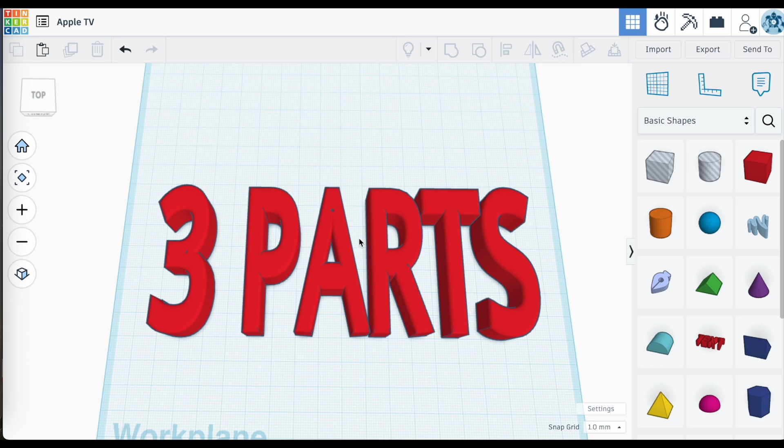Let's go. So in creating this mount, I can basically break this project up into three parts. Part one, creating an Apple TV cutout. Part two was designing a container that actually fits around the Apple TV. Part three was designing a mount that would allow the mounting of this container to the underside of this cabinet.

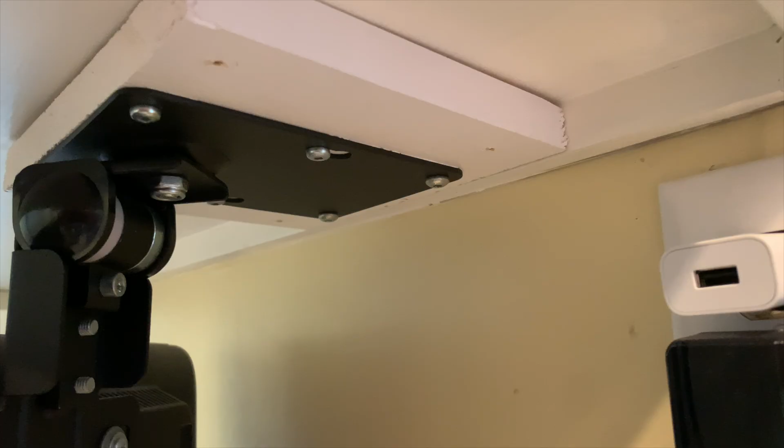Now for part one, creating the Apple TV cutout, there were some design elements that I wanted to make sure I addressed. I wanted to create a container for the Apple TV that would essentially wrap around the body of this Apple TV unit. Now, it's an older Apple TV, a 4K unit, but I wanted to use this with a small TV that was mounted underneath a kitchen cabinet. So for this project, I needed to create an Apple TV replica in Tinkercad that I could build around.

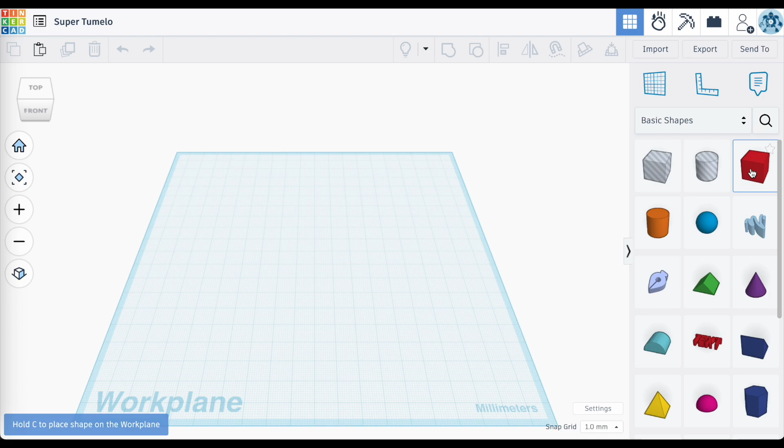The most obvious place to start was with a box and using those radius settings to create those nice rounded corners. Eyeballing the shape of the corners was not enough if I wanted to create a snug fit around the Apple TV. So to help guide me, I opted to take an image of an Apple TV of the same model, convert it into an SVG by importing it into picsvg.com.

The website is relatively straightforward to use. Once you've uploaded your image, you do have some options there regarding the detail and the types of filters, but I'll include a link to a video that goes into this in some more detail at the end of this video. Then I downloaded it and then uploaded it into Tinkercad.

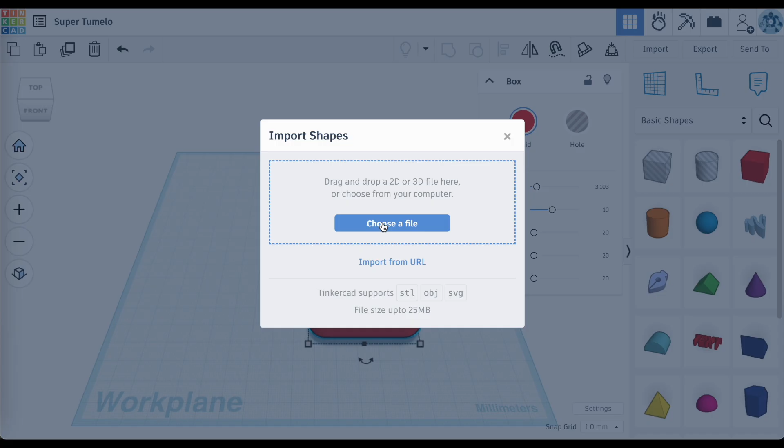Now, the ability to import images into Tinkercad can serve many different purposes beyond just creating templates, so be sure to check it out. Now, one thing, you just had to make sure that you imported it as art. Again, this was a relatively easy step, and this is what it looked like.

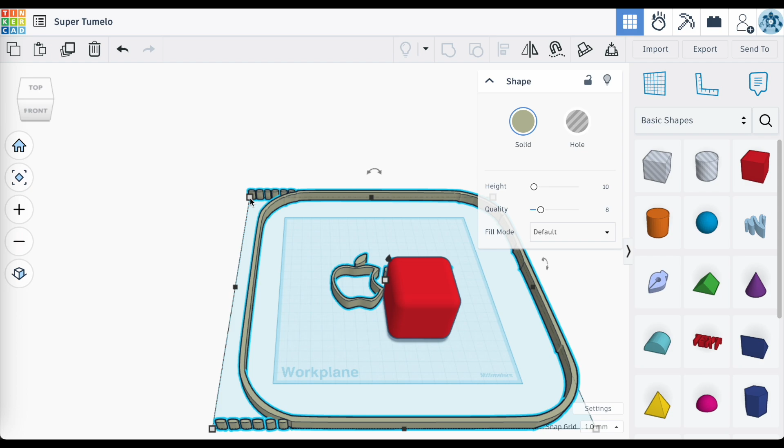This would then serve as a sort of template as I created my Apple TV replica, paying particular attention to those curves around those corners of my Apple TV. Now, the SVG was not of the right size after I imported it into Tinkercad, but I'm going to resize it later, so no problem.

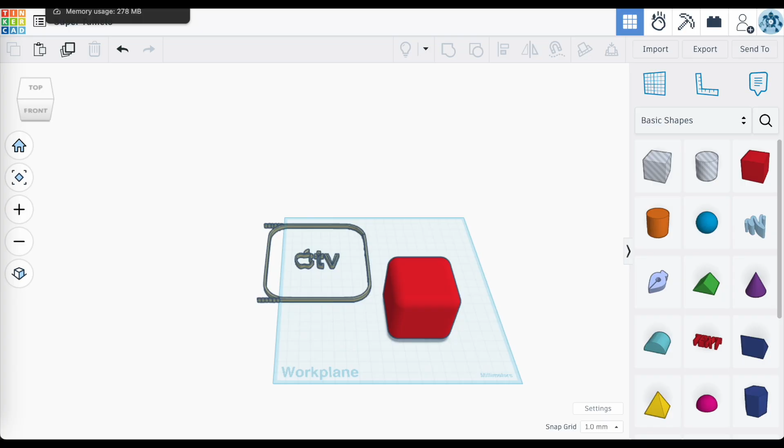I just needed to either measure the dimensions of the Apple TV or find the correct dimensions of the Apple TV. Now, for this particular model of the Apple TV, it was 98 millimeters wide, 98 millimeters deep, and 35 millimeters tall. So again, focusing specifically on those corners of the Apple TV, I just wanted to correctly size the length and the width of the imported SVG with the measurements of my replica TV.

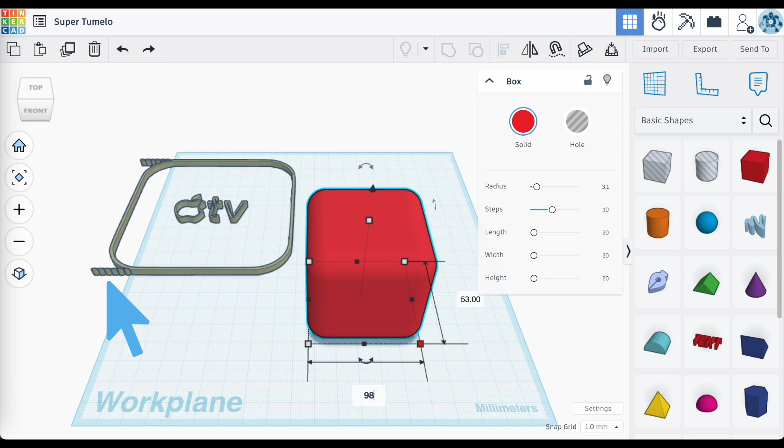I sized both the SVG template and my Apple TV replica so that they both had the same shared length of 98 millimeters. Now, I had to be aware that the SVG also included other details from the original imported image that were not part of the Apple TV. So these outside details became part of the dimensions of this SVG and not correct. So in this case, the dimensions of width along the x-axis were impacted, so I had to use the dimension of depth instead, which was the measurement along the y-axis.

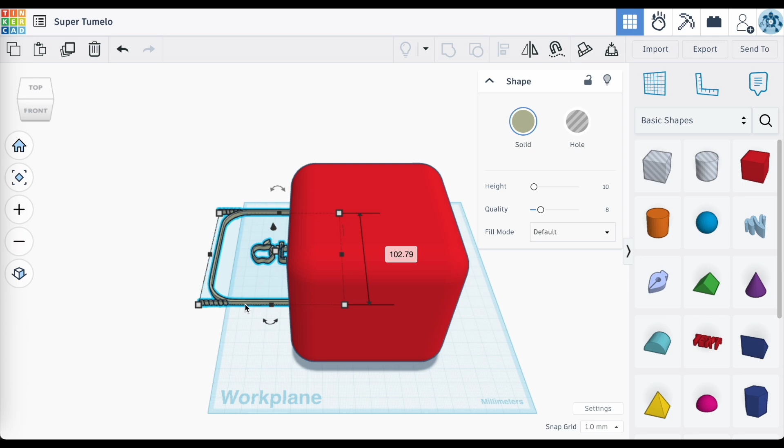In this case, pressing and holding the shift button as I pressed on one of the white grab points ensured that resizing the one dimension would also resize the other dimension, in this case, the width along the x-axis, proportionally. I also did this for the Apple TV replica. I just needed to press and hold shift as I clicked on one of those grab points, and then entering in 98 millimeters, the other dimensions resized themselves accordingly.

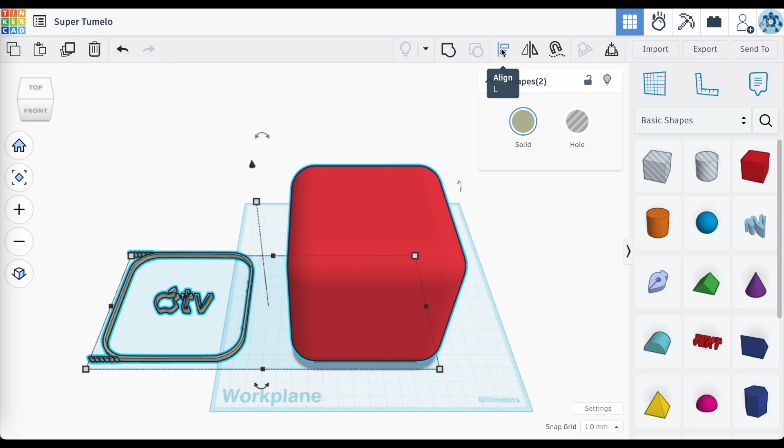Now, with both my Apple TV replica and SVG template at the right size in both the length and the width, I just aligned them together using the alignment tool. I really focused on aligning them along the edges rather than the center points. And then selecting on my Apple TV replica, I used the radius slider on the side menu and then adjusted the rounded corner of my Apple TV replica until it matched the template as close as possible.

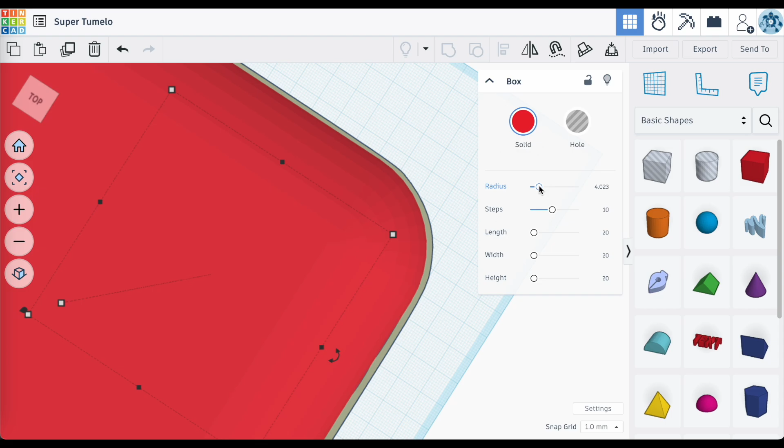Once that was done, I could discard the SVG template and focus on completing the rest of the Apple TV replica. It was here that I had to square off the top and the bottom.

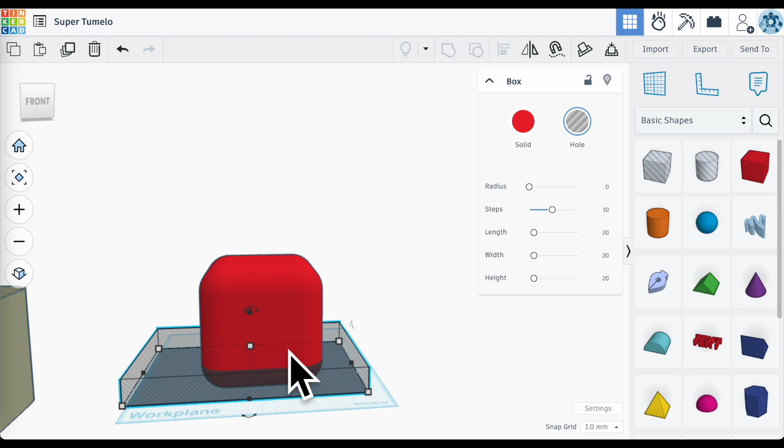Again, taking a box, converting it into a hole, and applying it from the top and the bottom of my soon-to-be Apple TV replica gave me the nice squared top and bottom edges I was looking for. Finally, I just had to ensure that the height of the Apple TV replica was set at the correct 35 millimeters. And there it was. This was my replica of the Apple TV.

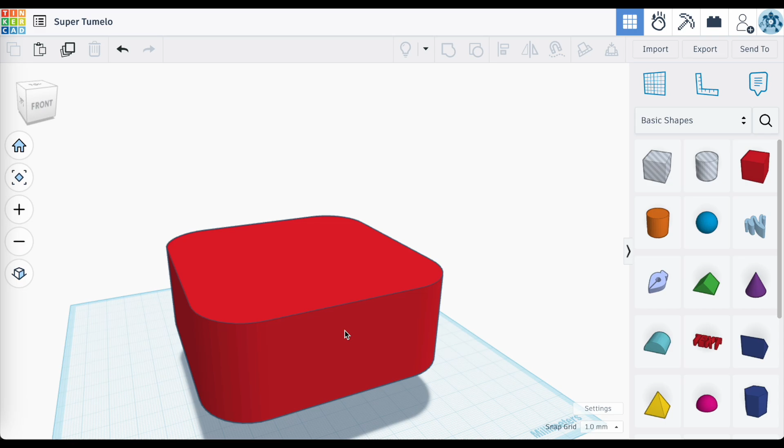The last thing I had to do was convert this into a hole so it could serve as an Apple TV cutout. Now, another note here: in creating an effective cutout, especially with the intent that you want to print this out, I also had to make the dimensions of my Apple TV hole slightly larger in order to account for the tendency for filament to expand slightly as it is being extruded in layers. This results in 3D objects that are slightly larger, or consequently holes that are slightly smaller than intended.

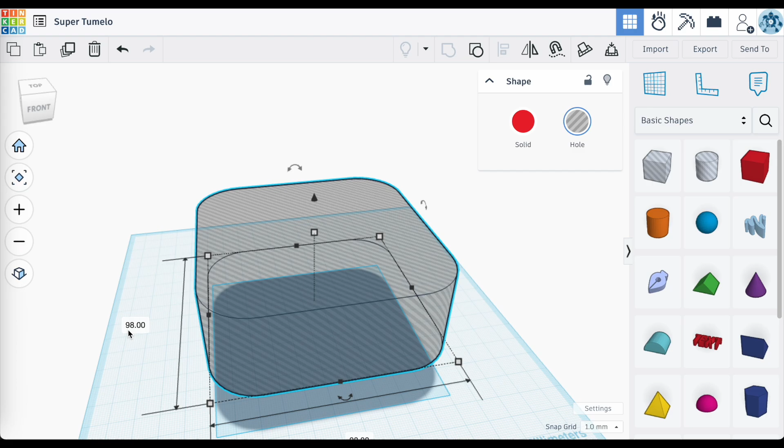So for my design, I wanted a good fit for the Apple TV, but with enough wiggle room so that the Apple TV could be inserted or removed from the mount with ease. So for me, I added a couple of millimeters to the depth, the width, as well as the height. So basically 100 millimeters by 100 millimeters and a height of 37 millimeters.

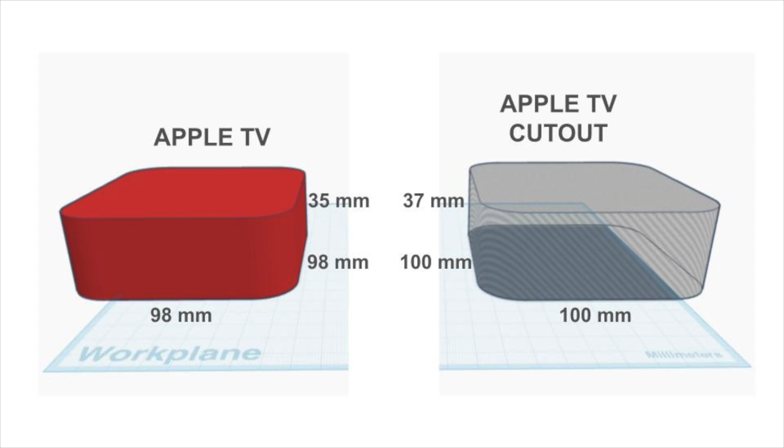Now with this Apple TV replica cutout ready, it was time to make the container. So part 2 is all about designing a custom container that provided a snug and secure fit to the Apple TV. So in order to create this container, I just basically took a duplicate of the Apple TV cutout hole and turned it into a solid.

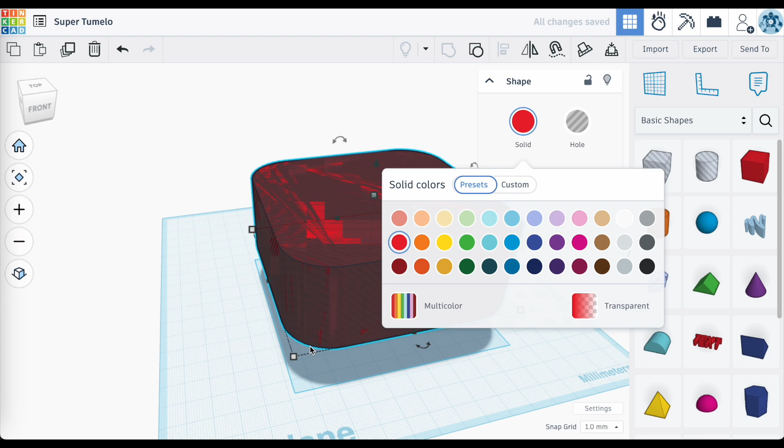After that, I then increased the depth and the width by 8 millimeters so that I would be left with 4 millimeters of wall thickness on either side once I aligned them by their center along the X and Y axis using the alignment tool. After that, I also added 4 millimeters of additional height to give a floor thickness of 4 millimeters once I aligned them both to the top surface along the Z axis.

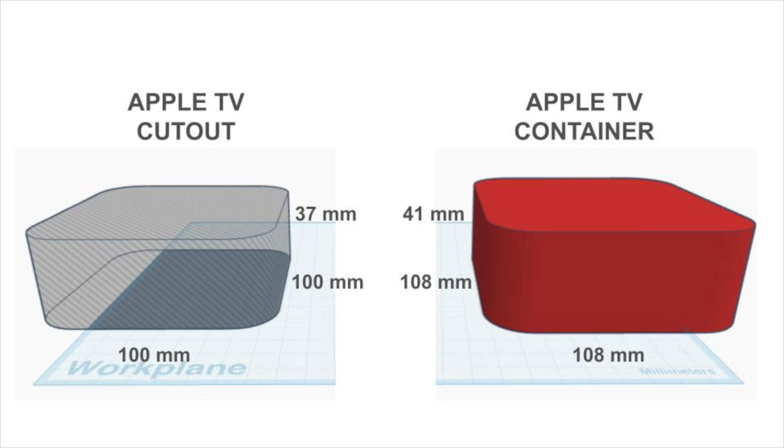So again, here's a quick overview of the changes I made to the dimensions of this Apple TV container. Next, I just grouped them.

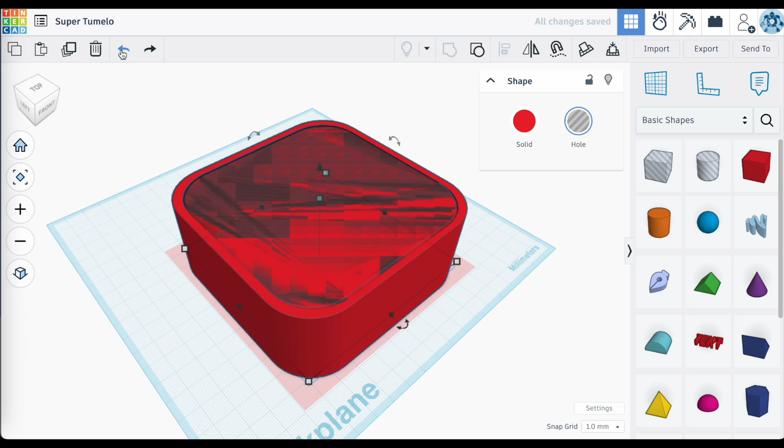Once this container was made, some of the design elements that I now had to incorporate into this were the openings for easy access to the ports on the back of the Apple TV. And this was simply accomplished by duplicating the Apple TV hole and then extending it out of the container and then regrouping them together. This would essentially cut out the perfectly sized hole that would allow me to move the Apple TV in and out of this Apple TV container.

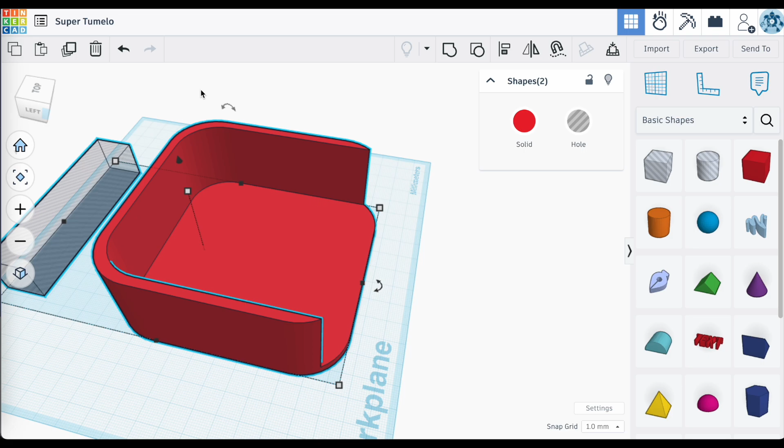I also had to ensure that there were openings to view the operating light at the front of the Apple TV. I also found out that there was an IR sensor on the front of the Apple TV, so I needed to ensure that it was not blocked. A simple box-shaped hole with the right dimensions that would allow for the light and the IR sensor to be uncovered was basically inserted to punch a hole through the front wall of this container. Again, using the alignment tool as well as the group tool were very important.

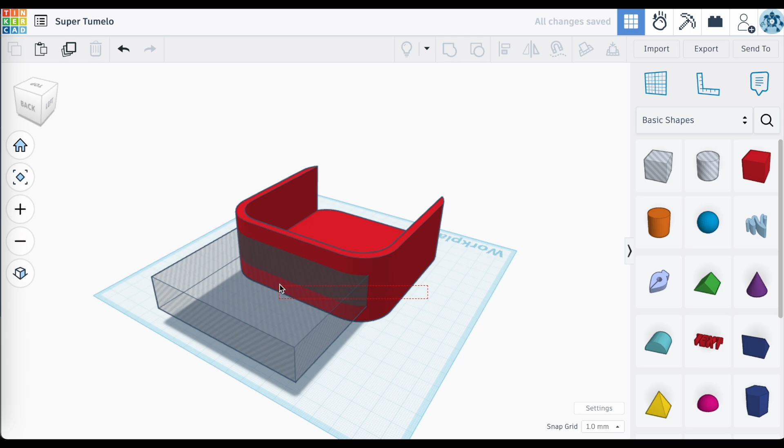Now, another design element was around the cooling of this unit. This was important. This Apple TV has vents located at the base that allows for the unit to cool itself. It was here that I decided to have the Apple TV sit upside down. That way I could have the hot air naturally vent upward as long as I had openings at the top to allow that to happen.

This decision also allowed me to add the feature that would help hold the Apple TV in the container and prevent it from sliding out. The top surface of the Apple TV was completely flat and would make it very easy for me to have an angled tab that would allow me to click the Apple TV into place once it was properly seated inside of the container and then prevent it from sliding out.

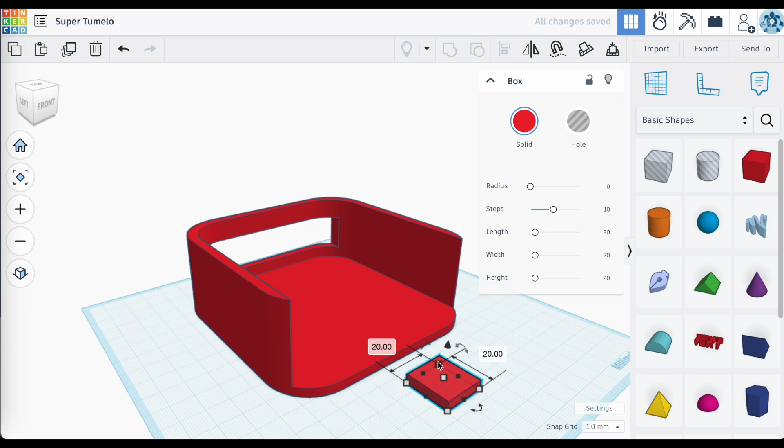This tab then had to be somewhat flexible, and I accomplished this by taking two long box-shaped holes and cutting into the base of the container. This would ideally allow for the resulting plastic tab to flex when the Apple TV moved into place, and consequently allow me to move the tab downward if I ever wanted to release the Apple TV from the container.

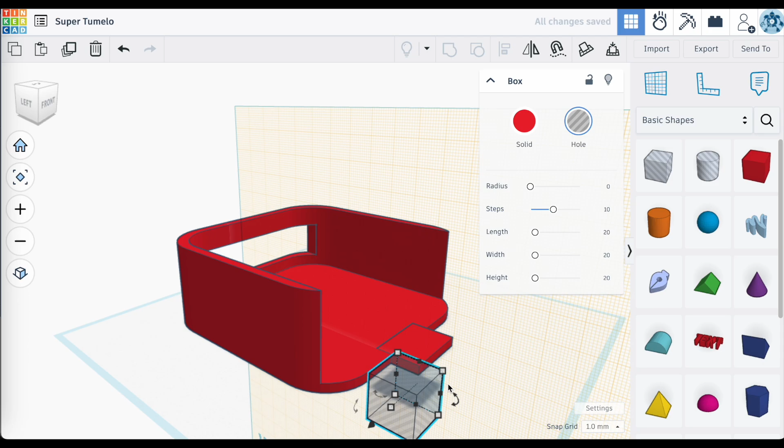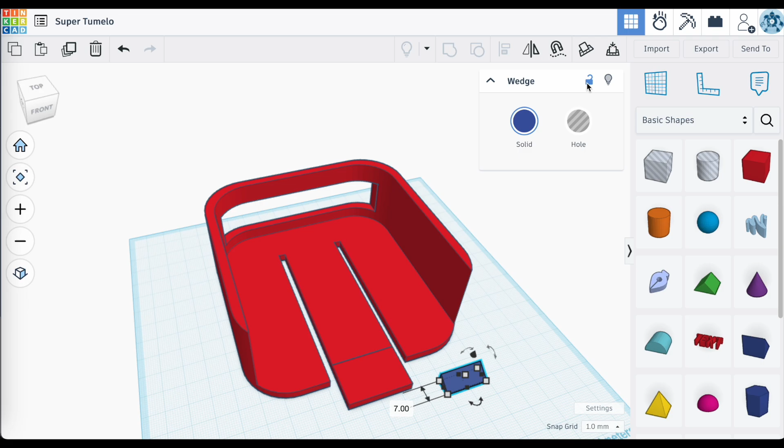I sped up the footage here a little, but I've been using the workplane tool a lot because just being able to throw down this workplane tool on any surface of this object and then drop other objects onto that surface has been so helpful, especially as I create this extended tab that comes out from the base of my Apple TV, throwing down an angled piece that will allow the Apple TV to slide in but then click behind it so it doesn't slide out. The workplane tool—an awesome tool. All right, looks good.

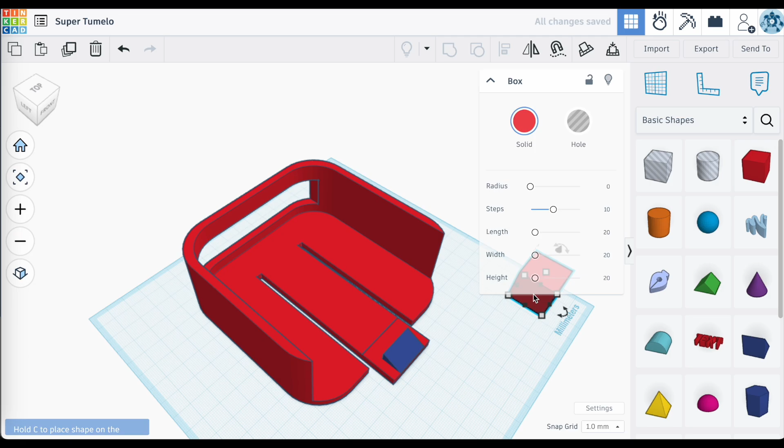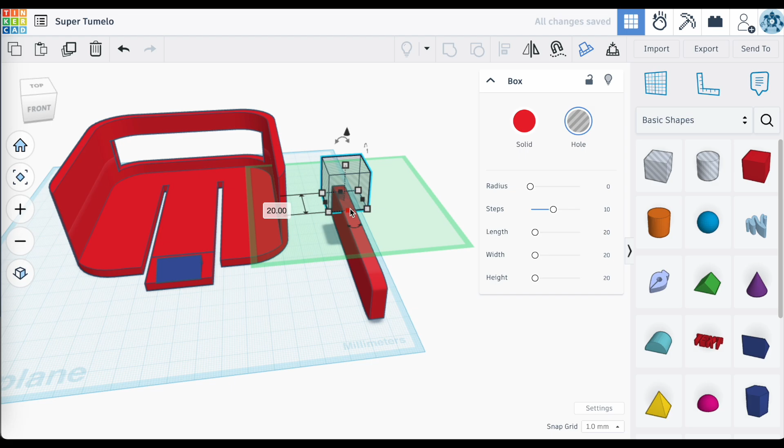Now, finishing off the top of the container, I opted to go with guide rails rather than a solid top. This was to ensure proper ventilation for the now inverted Apple TV, letting hot air come up and out of the unit. I also made the rails from a portion of a box with rounded corners using the radius setting, then dragged the shape out to flatten this curve somewhat and make it more gradual, so it would guide the Apple TV unit in as it was being inserted into the container. Using my Apple TV cutout as a guide, I used the workplane tool to rest these guide rails at the appropriate height for the Apple TV.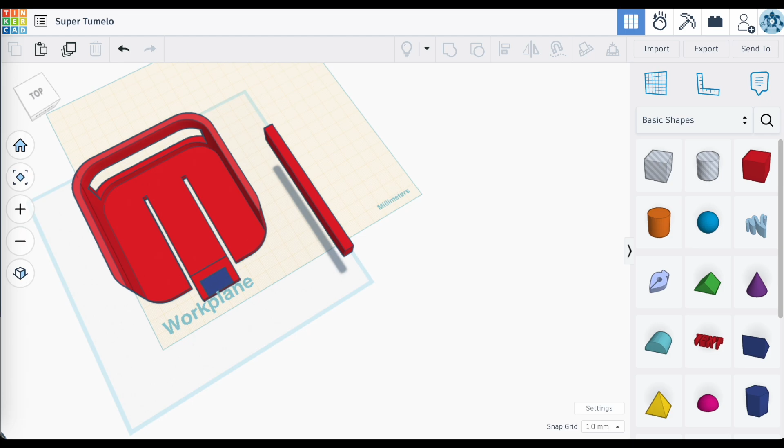Once I got the design right for one of the guide rails, I just needed to duplicate it, separate it out, group it, and then center it to the Apple TV container. Nice.

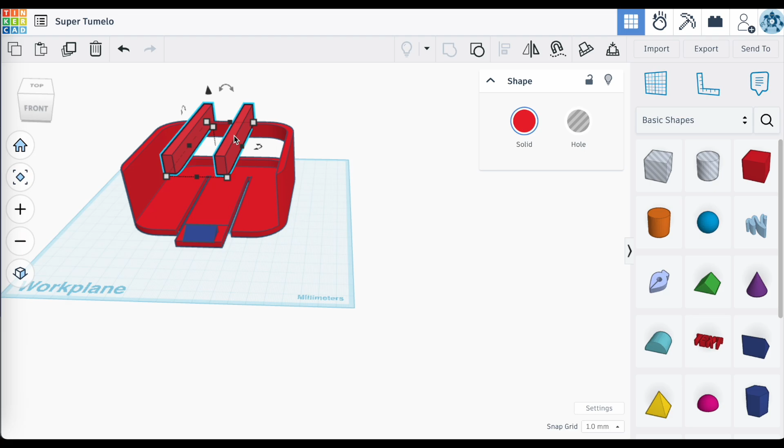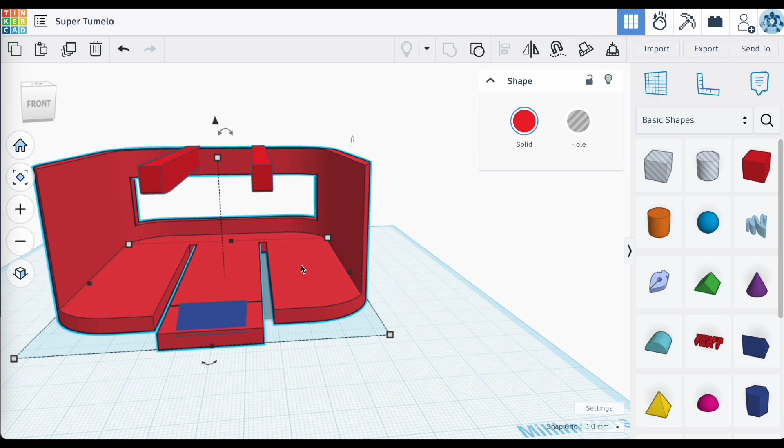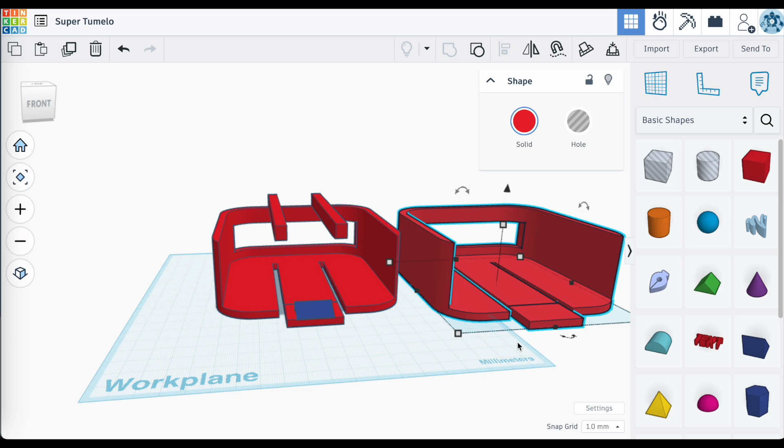Now, with the guide rails in place, it added to the height of this Apple TV container. I needed to extend the walls of the container so it was flush with the tops of those guide rails. Simply stretching the container upward wasn't going to work, because it would also stretch the floor of the container and change the dimensions of the slot the Apple TV sits in, risking that the Apple TV no longer fit inside. So I basically had to duplicate the Apple TV container and take away the top edge of that wall, so I could add it to the existing container and bring it flush to the tops of those guide rails.

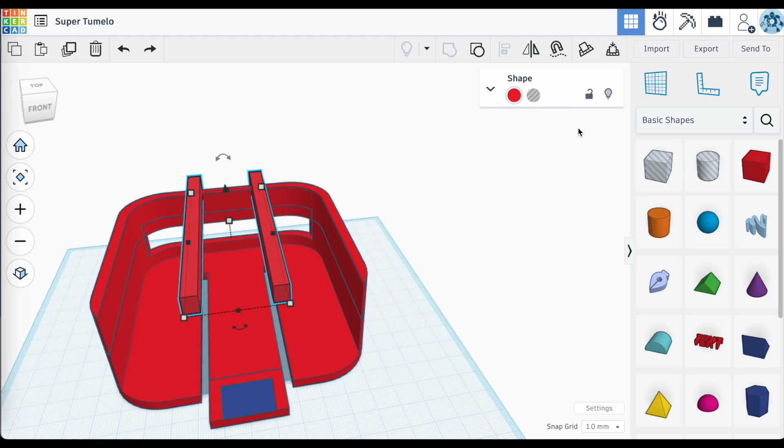So a few additional steps here, but I had to preserve that space for the Apple TV to fit properly inside of this unit. Not sure how everybody else would have done this, but that was the way I did it.

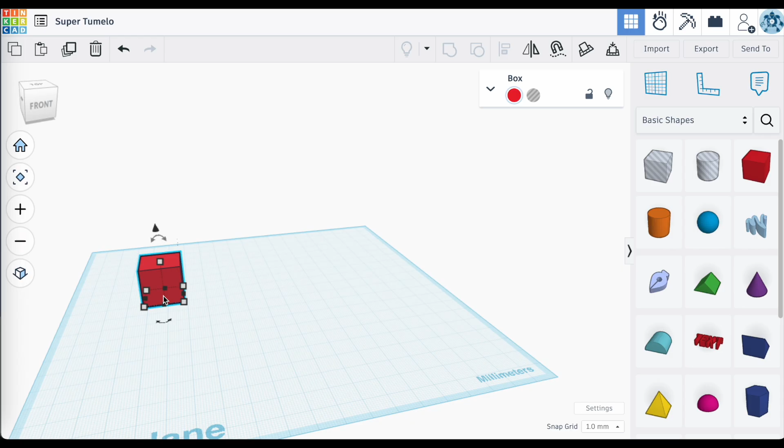All right, part 3. So I've got the container for my Apple TV done. Now it was figuring out how I was going to mount this on the underside of that cabinet. This had some specific design elements to consider, because I wanted this mount to fit over top of an existing mounting plate for a TV mount that was already there. Essentially, I was going to have this Apple TV mount straddle the existing mounting plate for that TV.

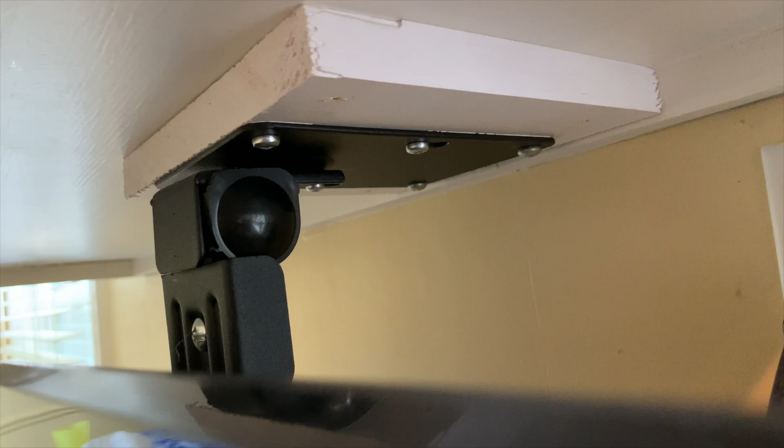So I had to measure the width of the existing mount plate, as well as the thickness of the mount plate, including the bolt heads that held it to the underside of the cabinet. I had to factor all of this in to create enough space so my Apple TV mount could be placed over top of this existing mount. So I had to make the plate wide enough to accommodate this cutout for the pre-existing mount plate and the bolts, while also providing ample space for its own mounting screws.

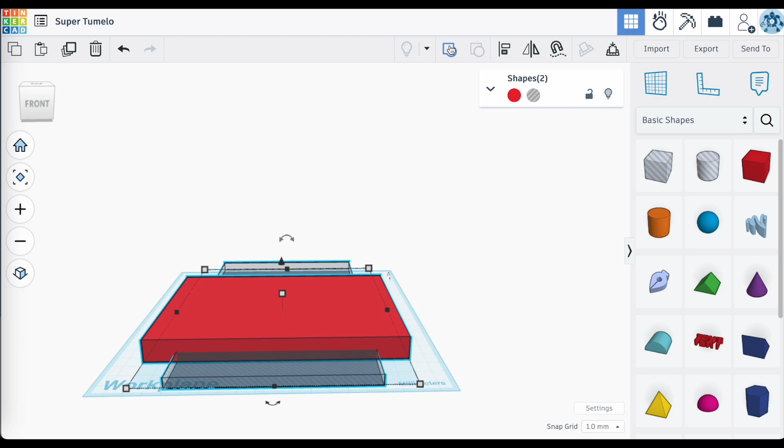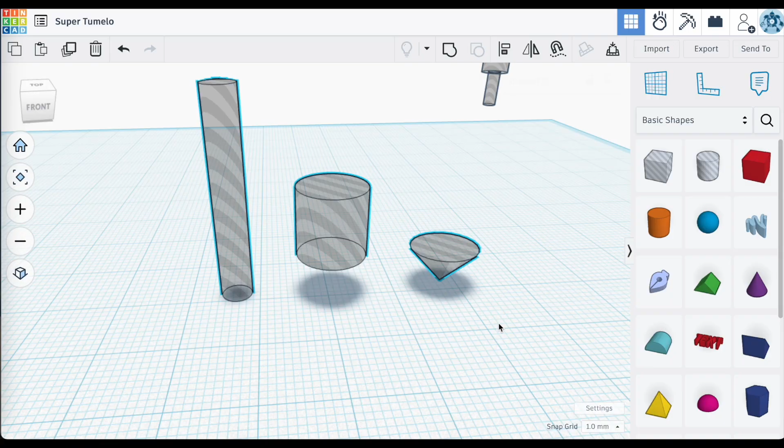I also wanted to create pilot holes for the screws that were countersunk into the base of the Apple TV mount, just to make it look good. I accomplished this with a few cylinder shapes that match the diameter of the screw as well as the screw head, and an additional cone-shaped hole to create that contoured hole fitting the angled base of the screw head. Then it was just a matter of aligning them together and placing them strategically along the sides of the Apple TV mount, basically 2 per side. I just love being able to add little details like this to any design.

Look at that. Looks good.

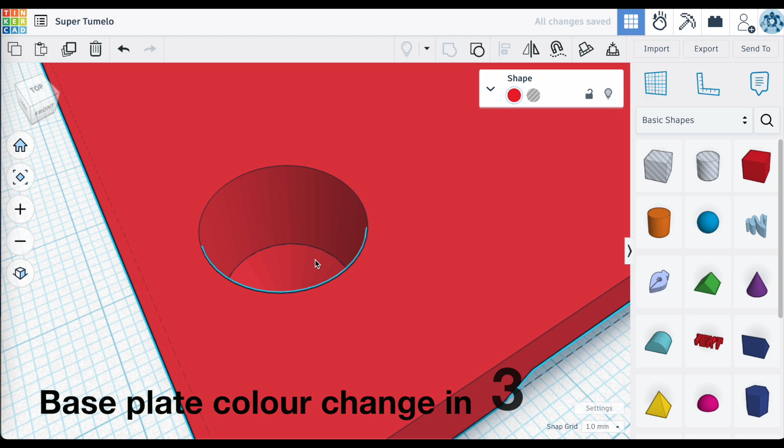To help ensure that the Apple TV could properly vent, rather than going with a solid base, I also added a large hole to the center of that Apple TV mount. Again, it would just allow the hot air to simply empty into that cutout space.

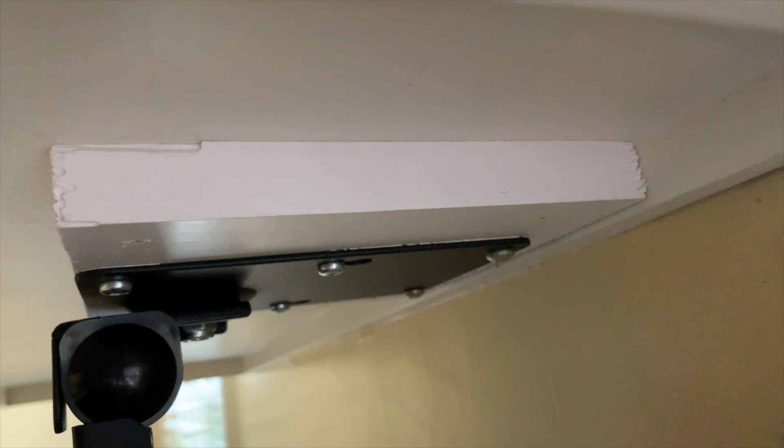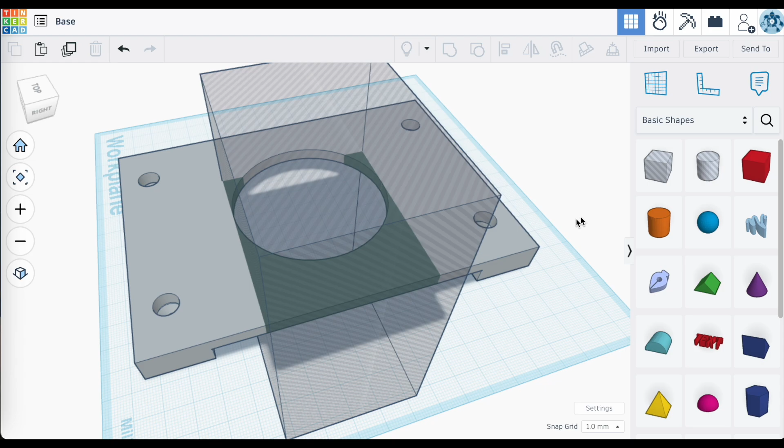However, to add to the complexity of this Apple TV mount, it also had to allow for the rotational movement of the arm that held the TV panel. If I didn't do this, it would limit how much I could rotate that screen, and you'd end up having that arm bumping into the Apple TV mount. So I opted to extend a cutout from the hole of the base plate towards the edge that would potentially be rubbing up against this rotating TV arm.

Problem solved. So I've been talking a lot about grouping, the alignment tool, the workplane tool.

I gotta throw in here the use of the ruler, and it really does come in handy once you get the hang of it.

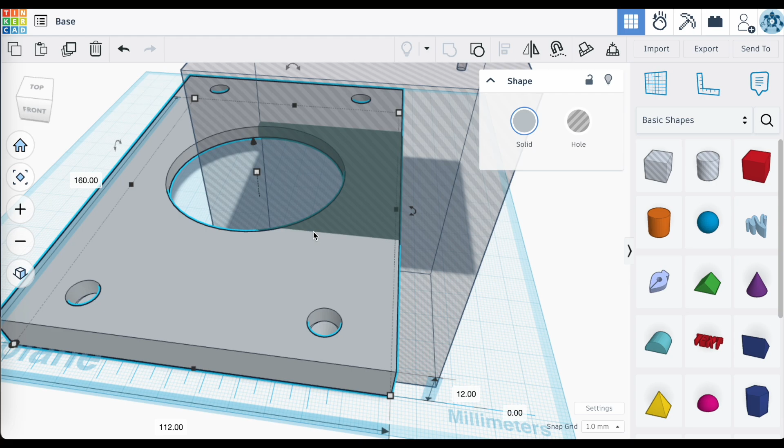For this particular situation, I needed to align this hole so that it started at the center point of the circle there in the middle of my base plate. Because I knew the dimensions of the circle and where it stood in that base plate, the ruler really comes in handy because I can set that hole exactly where I want it to start and create this seamless cutout in my base plate.

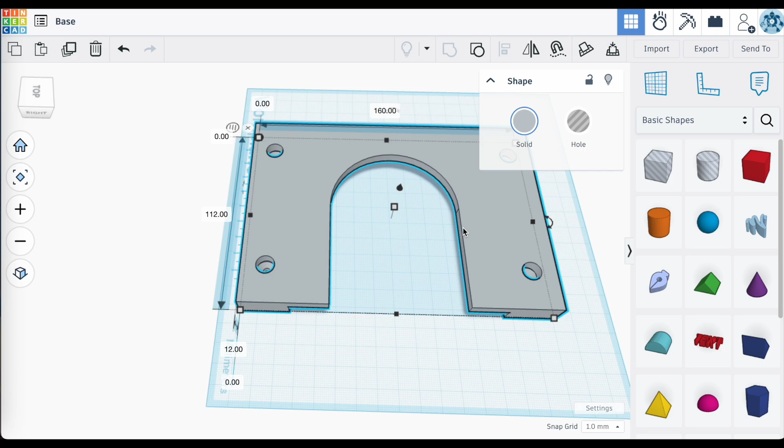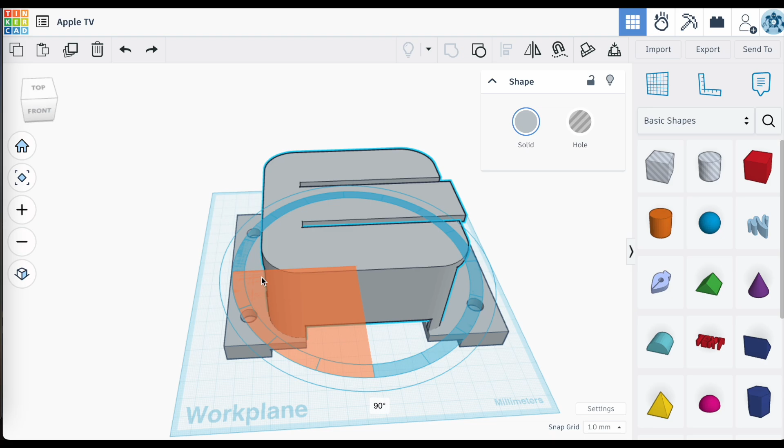Now, when bringing the Apple TV container together with this mount, I also had to rotate the container 90 degrees so that the Apple TV would now load from the side rather than from the back. Unfortunately, there was just not enough depth underneath that cabinet to allow for the Apple TV to be inserted from behind. Not a huge deal, but ideally I was kind of hoping to have that indicator light facing forward.

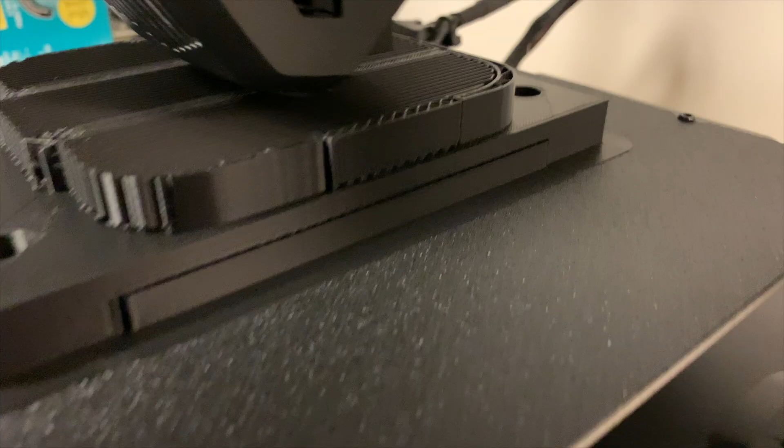So putting them both together and looking at this finished product, printing it up as one piece was certainly an option, but it would result in a lot of filament being wasted to produce supports for this print. So I decided to print this up as two pieces and then glue them together.

I won't get into it here, but I had to create an embedded footprint of that container into the base in order for those two pieces to come together nicely and provide some good surface area between the two pieces for the glue to do its work.

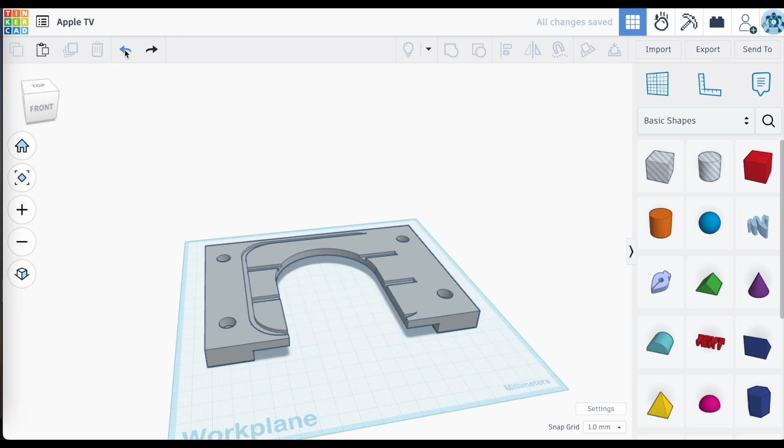So to the printer we go. The container, and then the base.

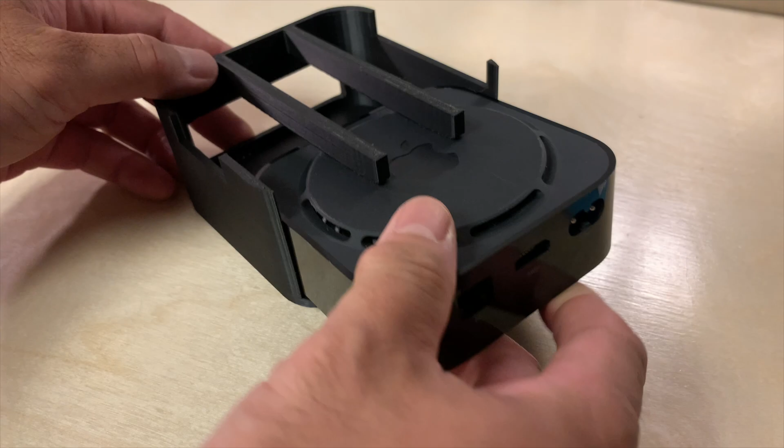Then it was just a matter of checking to see if the Apple TV fit in nicely into the container, and it did. Slid in no problem, and the locking mechanism worked like a charm. It did not want to come out on its own.

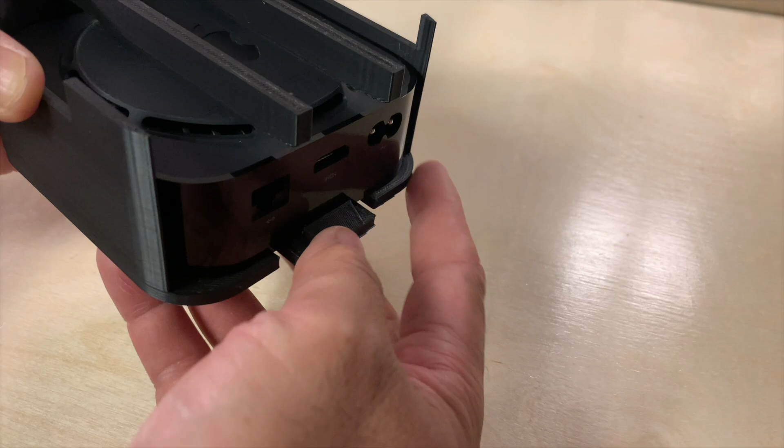Next, it was time to install the Apple TV mount. Drilled in some pilot holes into the base of the cabinet, and then fastened it to the base of that cabinet using the screws.

The arm swiveled nicely, did not bump into the Apple TV base at all.

Final check, Apple TV slides in nicely. Look at that, I can totally see the indicator light.

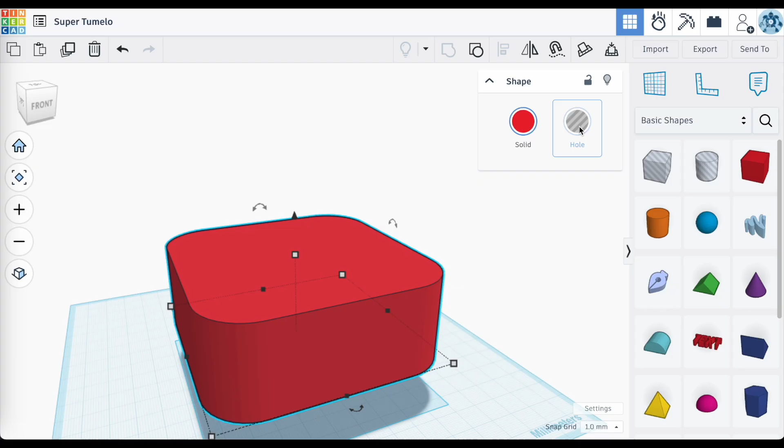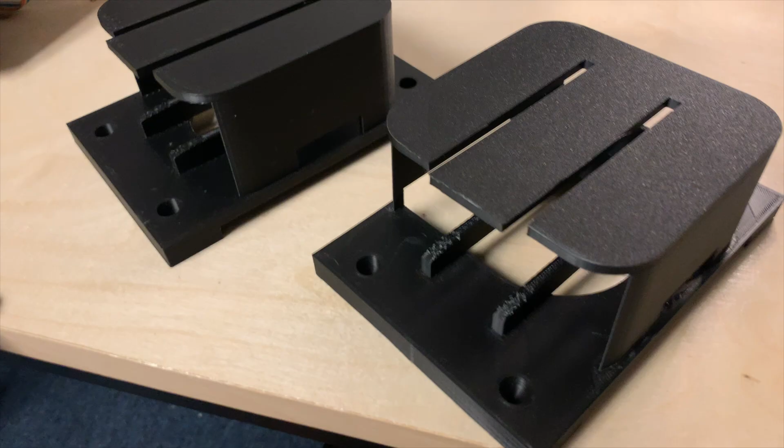Listen, I am not going to win any awards with this design, but what I love about this is that I can design my own things using Tinkercad and then print it up and create things that I cannot get anywhere else that serve my specific needs and my specific criteria for design. Just know that anyone can do this. If I can do this, you can do this.